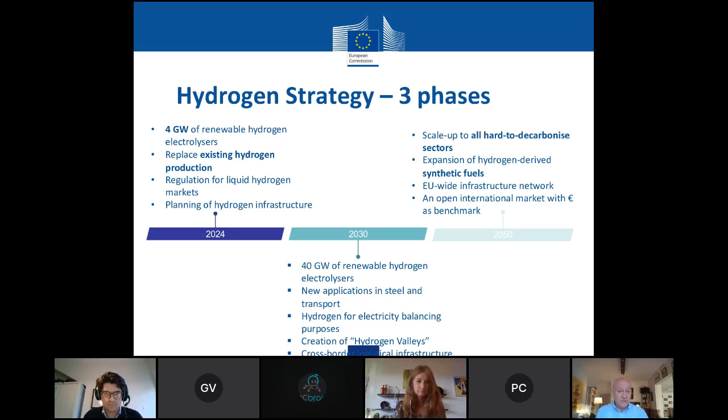Let's move to the next slide to talk about what are the main measures envisaged by the strategy. It is very obvious that we need at the same time scale up renewable hydrogen production and foster renewable hydrogen demand in general, but green hydrogen, obviously.

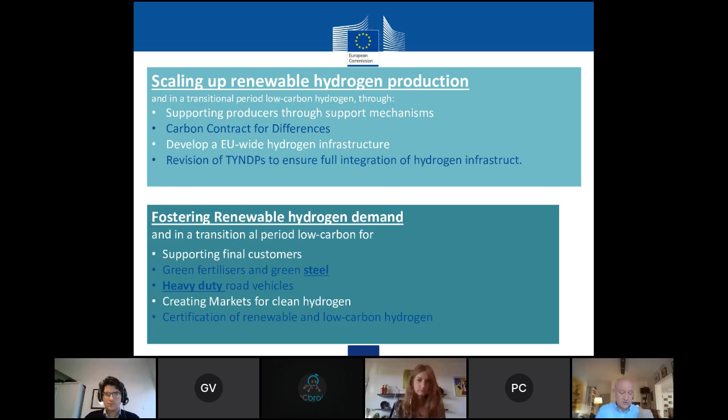So the point is we need to support the producers through proper support mechanisms. I just put there one of them, carbon contracts for difference - to pay the difference to the normal production cost of energy and have them produce hydrogen instead. But there are many other measures, including IPCEI projects and the likes, where the government pays some delta to make the projects viable. But the important thing is it must be a massive scale up, otherwise we will not get the cost down far enough.

Second thing is we need an EU-wide hydrogen infrastructure which can transport the hydrogen. This will be difficult to achieve at the competitive level by before 2030 because it's going to be based very much on repurposing existing gas pipelines. But until that, we need to find other methods of transportation which will still be useful afterwards, which are very much in the area of liquid hydrogen or organically bound hydrogen, already packaged hydrogen for use afterwards in form of ammonia or methanol or whatever. Compressed hydrogen will not really do the job for any long-term transportation.

And there's a number of measures. Just one important one that is also very operational is to have input to the 10-year plan for network development. That should already include a lot on hydrogen repurposing. And this is the production side and the transmission side.

And now we talk, of course, about the demand side, because who will take all this hydrogen if it's produced? Nobody will produce it if nobody is an uptaker. So there, it's important to support the final customers to develop these markets. I just give two examples here, which have been found most strategic at this moment: green fertilizer and green steel. So industry in general, industrial use of hydrogen. And particularly green steel is very promising, but also reasonably difficult to achieve.

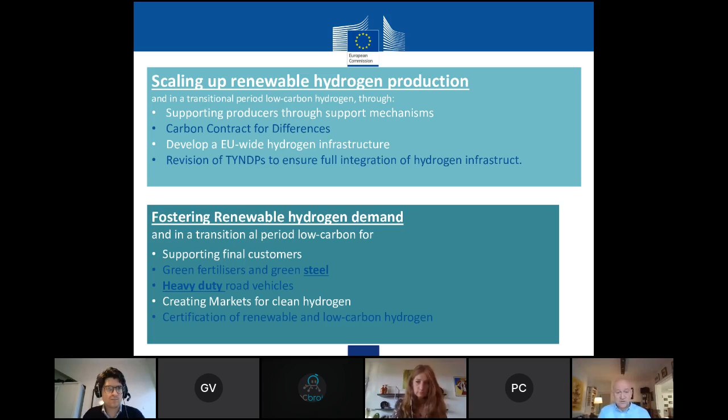And then the thinking is also to go for an accountability system that may even be based on blockchain, just to make it foolproof. We know from the renewable sector how difficult it is to rely on GOs because they have gotten not such a good reputation. Okay, so much very quickly for the strategy.

Now let me talk a few words also about the alliance. The idea is to involve industry, but in addition to that, all active stakeholders in the clean hydrogen ecosystem, and bring together supply and demand, including all of society and NGOs. We have more than 900 members today, 1,000 maybe possible before the weekend. And if you want to sign up to it, it doesn't cost anything.

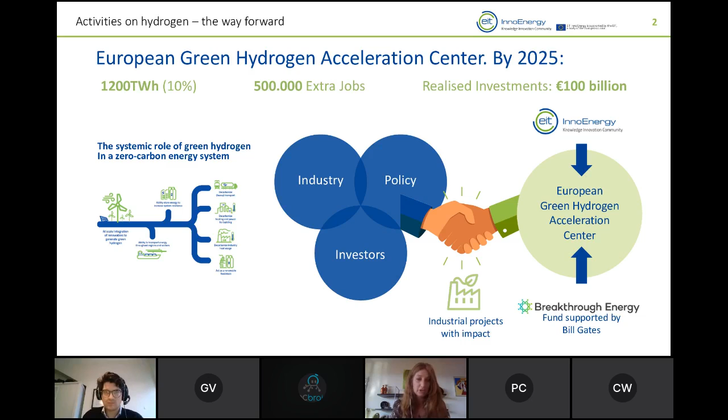And today we have already signed the agreement of our first industrial pilot that aims to produce green steel, which is exactly what Mr. Weinberger was commenting before, at a competitive price with green hydrogen. And the beauty of it is that the project is replicable.

As I was saying before, during the past 10 years we have been investing and de-risking solutions for customers and investors to work with in order to accelerate dramatically the energy transition. So today, more than 40 solutions are ready to market for renewables, either renewable generation or optimization - that would be photovoltaics, wind onshore and offshore, of course, tidal and wave energy. And as far as the hydrogen value chain is concerned, we have brought to maturity several types of solutions that are all across the value chain, as you can see.

So there's production of hydrogen with electromagnetic electrolyzers from Hymeth in Denmark. And also, Christian, you were talking about transport as being a major stake. So of course, HySiLabs is the one tackling that, doing liquid transportation of hydrogen. And when we talk about transportation, it's also important to optimize the flows to have the best infrastructure possible and lower the cost—that's the job of DCbrain, who you'll hear from later. Thank you, Christian, for talking about the importance of certification. That's what FlexiDAO is bringing today: real-time renewable tracking based on blockchain.

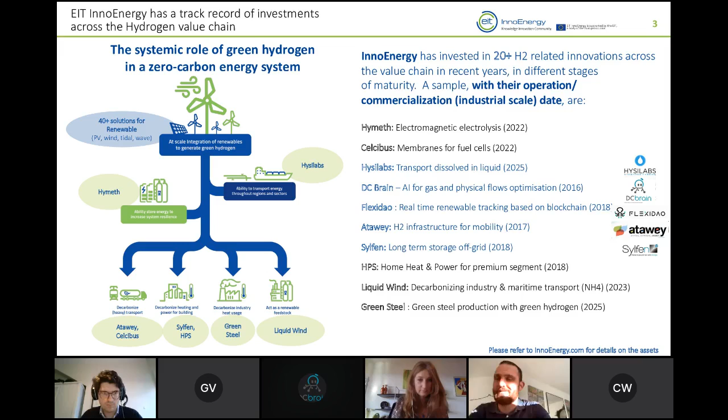Thank you, Raluca. I'm Pierre Casanova, co-founder of HySiLabs. HySiLabs is a startup based in the south of France and supported by InnoEnergy. We are based in Aix-en-Provence, and we are developing a new way to transport and store hydrogen.

But before we start, maybe a quick wrap-up of what Christian and Raluca just said. Hydrogen is a key element in the energy transition. It can be easily produced simply by splitting water, and you'll see this kind of technology with the other speakers. It's a key element to transport and store energy. When you use hydrogen, the only byproduct is water, so it will play a real role in the energy transition and can be used in several applications.

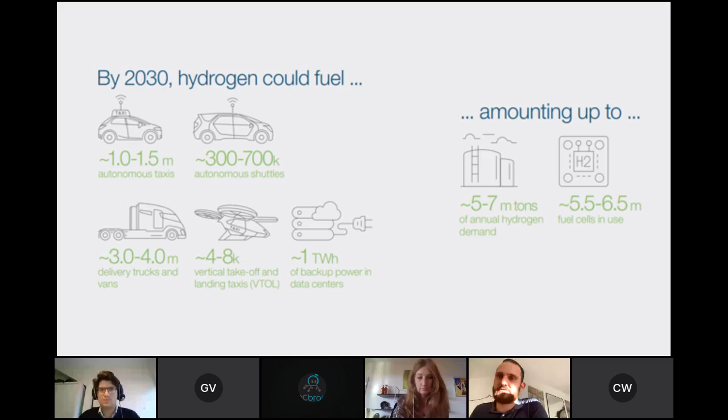I won't spend much time on this slide since other speakers will talk about final users and applications, but a quick overview: hydrogen will have a real impact in the mobility sector, from small vehicles to large vehicles, as well as maritime and stationary applications. It's a huge market—I won't go into data and figures, but hydrogen transportation and storage will be something we have to deal with for the future.

The main challenge right now in hydrogen is how to transport and store it, because we're pretty sure we'll have the capacity to produce hydrogen in massive amounts, and we'll consume this hydrogen across different applications like maritime or mobility. But because of its gaseous state, hydrogen is still complicated to store and transport at massive scale.

So what we developed at HySiLabs is a new way to transport hydrogen. Instead of storing and transporting a gas, we use a liquid carrier. This liquid is stable at standard conditions and has a high hydrogen storage capacity. Compared to high pressure storage, you can store up to 7 times more hydrogen for the same volume and weight. When we compare our solution, HydroSil, to the market, it has the highest storage capacity, even higher than liquefied hydrogen.

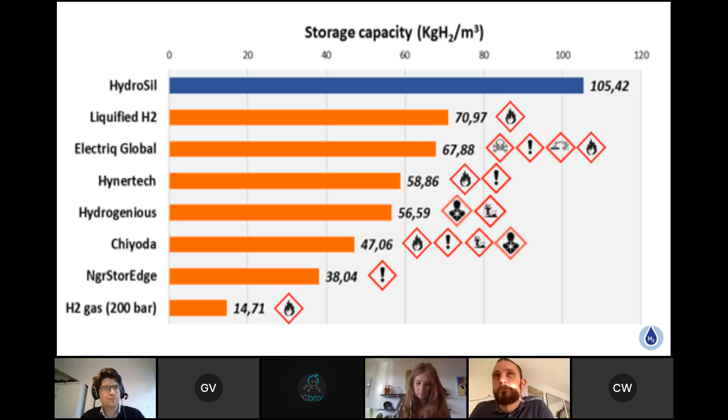It has been developed in France and in Europe, and has been patented. We patented the molecules, and we also patented all the chemical aspects of this solution.

So that's a quick view of how we will be implementing this value chain. Basically, we will plug the solution, a hydrogen unit, to a hydrogen production plant. We will bind the hydrogen into the liquid carrier, use the same liquid logistics as before, and then release hydrogen at the hydrogen consumption plant, for instance a hydrogen refueling station. We don't need any energy to release the hydrogen from the liquid, we just need energy to charge the hydrogen into the liquid.

So the main difference of this solution compared to others is that we don't need energy to release the gas. So we don't need specific, complicated infrastructure to release the hydrogen from the liquid carrier.

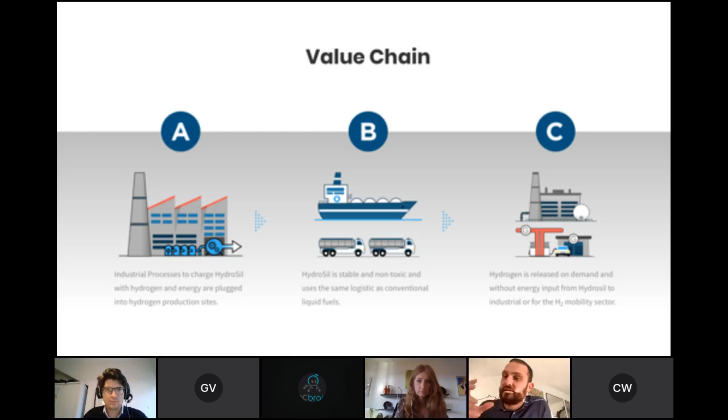That's a quick view of what we have done so far, and the team. This slide is about 3 months old, but we are now 12 people in-house, and we will be 15 at the end of the year. We have a strong advisory board supporting us with strong expertise in different fields, from the utility sector to oil and gas companies.

About the timeline, since Raluca talked earlier about technologies ready for the market: we created the company in 2015. We've been supported by several big companies, but at the beginning, thanks to InnoEnergy, we raised 2.5 million euros. We have several projects ongoing right now that we'll talk about later, and we will look for funds at the beginning of 2021 to accelerate the integration of this technology into the market, and to accelerate co-development with major players in the utility sector and oil and gas companies.

Also about the ongoing projects: on the left of this slide are all the end users interested in the technology. As you can see, in maritime applications there are a lot of projects. On the right side are all the projects we have ongoing that we can talk about, though some are confidential. We are part of a big consortium with ENGIE and Toyota, which consists of transforming sun power into a liquid fuel, and HydroSil will be this liquid fuel. So basically it's a European technology and a European startup, which is why you can see a lot of European companies we're dealing with.

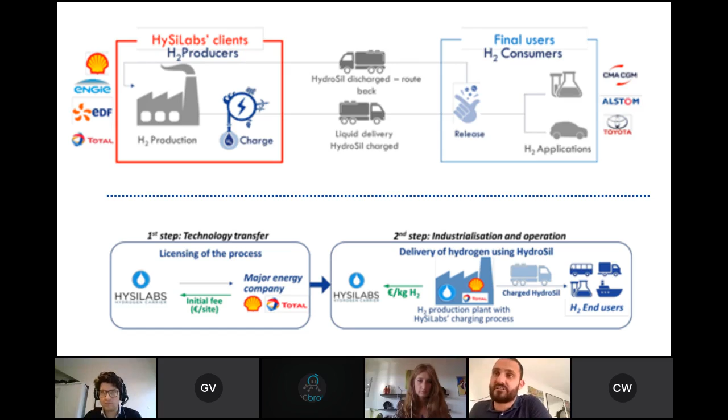That's a quick overview of how we work. We are transferring the solution to our customers, which are hydrogen producers -- it could be oil and gas companies, utilities, or EPC companies. We will not build our own plants; instead we work closely with these major energy companies to build plants together to charge hydrogen and then deliver it to different kinds of applications. That's why we can target a lot of applications, including all the hydrogen applications presented by Christian before.

And as you can see, there is a real need for hydrogen transportation and storage. We've been supported several times by InnoEnergy again -- thanks again, guys -- but also by big companies like Shell and Airbus. We're also very proud to announce that we've been part of the Green Deal award challenge call we talked about before, and we've been supported with more than 2 million euros. I'm pretty proud of that, and that's also the reason we've tripled the employees of the company over the last 3 months.

So that's pretty much all I wanted to say. As I said before, I'll be quick. Again, many thanks for this opportunity. So basically, we make hydrogen easy to deliver and store by developing a unique hydrogen liquid carrier. Thank you, guys, and I'll be able to answer your questions at the end of this webinar.

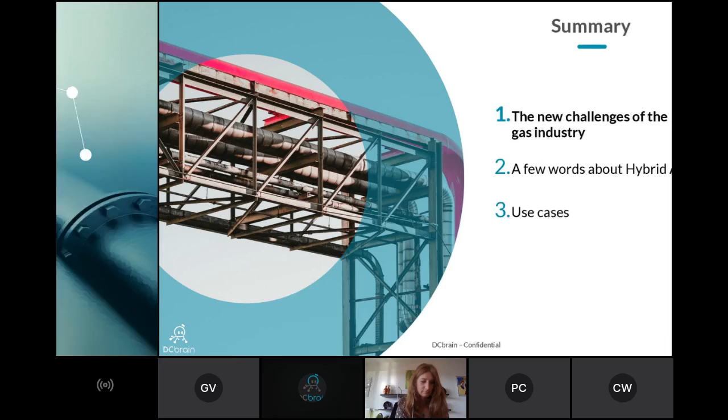So basically, very rapidly, the new challenges of the gas industry following hydrogen injection. As you all know, gas network operators are divided between transmission, so big pipelines, and distribution operators, so small pipelines that bring the gas directly to your homes.

Those operators have new challenges related to energy transition. They have new rules to comply with. Customers need higher quality of service. And of course, they need to inject new gases into the network. I've been talking a lot about biomethane and biogas for the past 10 years, and we are talking a lot about hydrogen for the past 6 months, I would say.

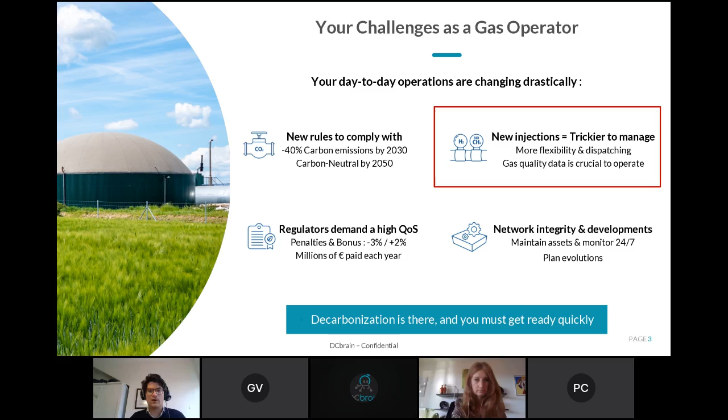Obviously this project has started before that, but everybody is talking a lot about hydrogen injection into gas transmission networks. And it's creating new challenges for gas TSOs. It has been already said before, injecting hydrogen into existing networks is very interesting, but also very challenging.

It's an interesting option because the fundamental idea is to store and transport green electricity using power to gas assets. You are going to generate electricity based on renewable energy, PV, wind farm, and so on. And this electricity, most of the time, you can't consume it right away, so you need to store it. Either you can use batteries, mechanical storage, and so on. But you also can convert it to gas using different techniques, globally called power to gas.

So you transfer power to electricity to gas, and then this gas you can inject into existing gas networks, which is very interesting because you already have the assets, you already have the infrastructure, so you are able to store green electricity with limited capex, limited investments. It's a very interesting idea, but it's very challenging.

Why? Because the gas you are going to create is called green hydrogen, and hydrogen does not have the chemical composition of classical gas. It's a very thin molecule, so it can have an impact on asset integrity. And it does not have the same quality as classical gas, so it will have an impact on network balancing, invoicing, and quality of service. Meaning that if a customer is going to get more hydrogen, they are going to pay less, because hydrogen brings less energy than classical gas.

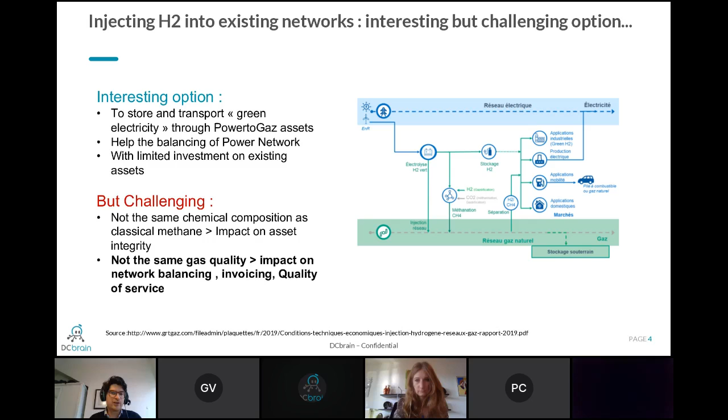So globally, if you inject new gas, especially hydrogen, into an existing gas network, you need to be able to track gas quality. You can do that by implementing a lot of sensors on the network, chromatographs, but that's going to be super expensive. That's why at DCbrain we came up with a software that is able, by computing flows, to better track gas quality.

Basically, we created what we call a smart gas management suite. It's 5 different modules of the same software dedicated to gas management issues: asset mining, loss analysis, track and forecast, smart simulation, and INES optimization. The software is called INES, for Intelligent Network Solution.

And then you can use artificial intelligence, basically the idea of using all the data coming from the networks to better understand flow propagation. The problem with purely artificial intelligence is that you need a super high quality of data, and this quality of data you will never reach. So basically, at DCbrain, we created what we call hybrid artificial intelligence, and the idea is we are going to use artificial intelligence based on data to complete and enhance classical modelization.

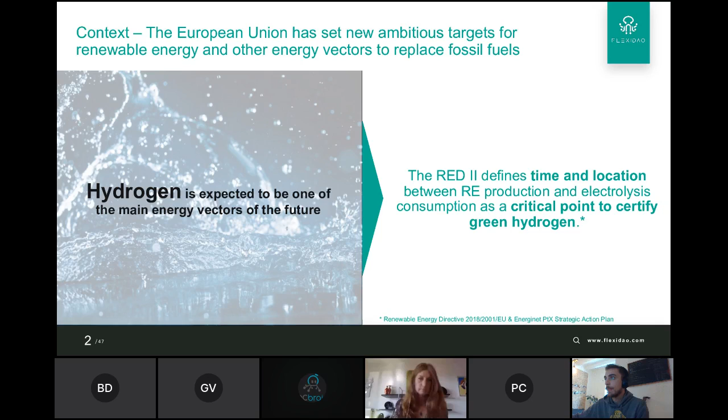And this is indeed what I've just said, why time is important. There's a pretty famous Stanford study that says whenever a grid passes 20% penetration of renewable energy, the yearly accounting of renewable energy, certifying energy on a yearly basis, leads to wrong calculations of CO2 emission avoidance. This is because renewables have inherent fluctuations, so if you take an average or total volume over the year, you're completely ignoring those fluctuations.

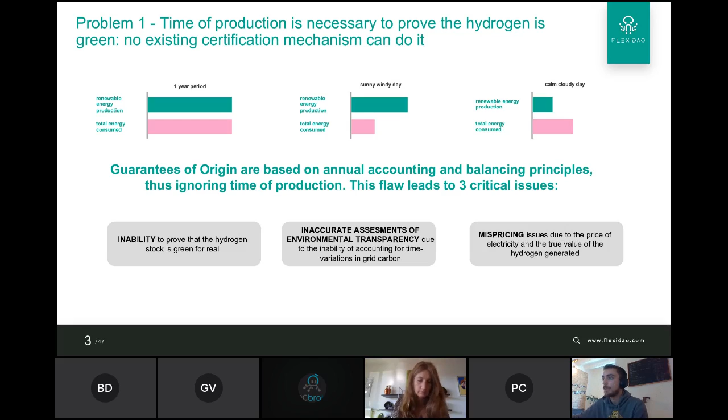With such a system, we could have an electrolyzer that consumes only at night, buys solar guarantees of origin, and that would be green hydrogen. Then, of course, the CertifHy project, the coalition now defining how guarantees of origin will be converted to hydrogen certificates, will somehow tackle this issue. But the underlying problem remains that there are currently no certification mechanisms with high granularity in time stamping that can reflect the actual production curve.

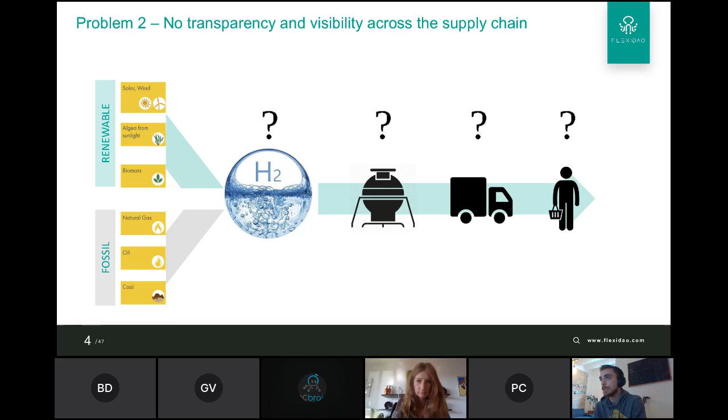The second issue is that supply chain traceability still has low visibility and transparency. At least this is what our partners are telling us, and that's why they're interested in this. As some of you might know, blockchain technology at an enterprise level has reached maximum scalability when it comes to supply chain traceability.

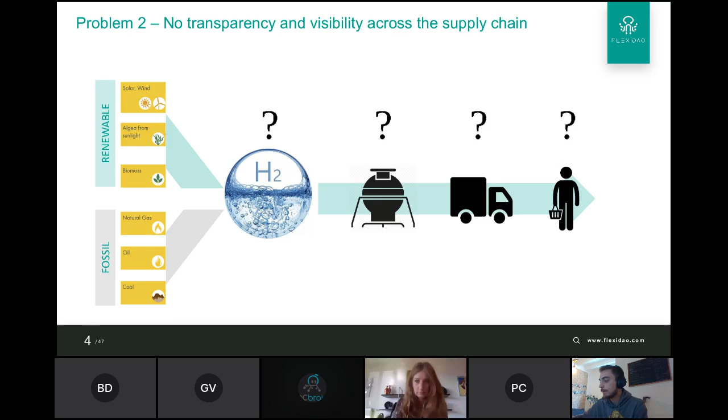So what we're trying to understand is, as a company with a validated technology in the market, can we actually prove that the electrolyzer works at the same time as production, and then create a digital certificate that is bound and linked to an hourly green energy certificate, tracing it all the way down the supply chain. The supply chain part is new for us as a company. As I said at the beginning, we're strongest in the renewable energy part, and that's where we're mainly focusing right now. In a nutshell, our product in the market is called Respring.

Respring is a tool, a platform that enables the certification of origin and end-to-end traceability of energy vectors. Prior to hydrogen, we were working with renewable energy, but not only that - we work with electricity as a whole, with green gas. Now we're taking the opportunity, with a few partners, to explore how this application can increase transparency in the supply chain of the green hydrogen market, and ensure that we are really betting on green hydrogen.

So what the platform does - and we are now building a test in Spain with a major utility we cannot yet mention, press release will come out soon, and another one in Denmark.

Basically, the platform collects production data from different plants. Either if there's a PPA, it can also be off-site, thanks to our technology. Then it collects consumption data, and does a real-time certification of production matched with the electrolyzer. Once a certificate for a specific unit of hydrogen is created, we can track it along the different steps of the supply chain. We have a user interface that allows all the different parties to interact and download the data. Since it's a distributed database, all parts of the value chain can access the data and at the same time write whenever the hydrogen reaches a new point, and it's completely secure and safe, so data can be trusted by all parties.

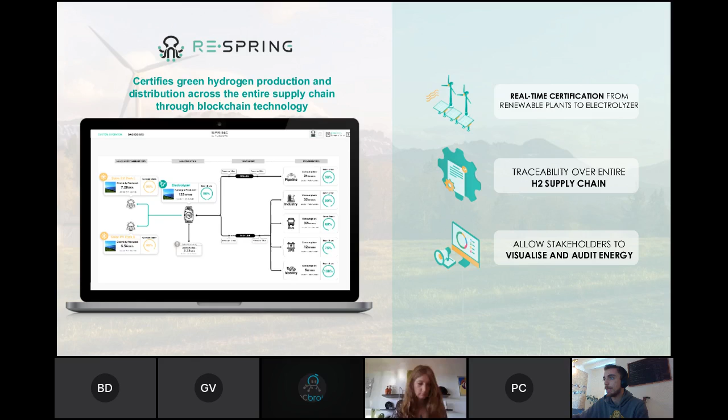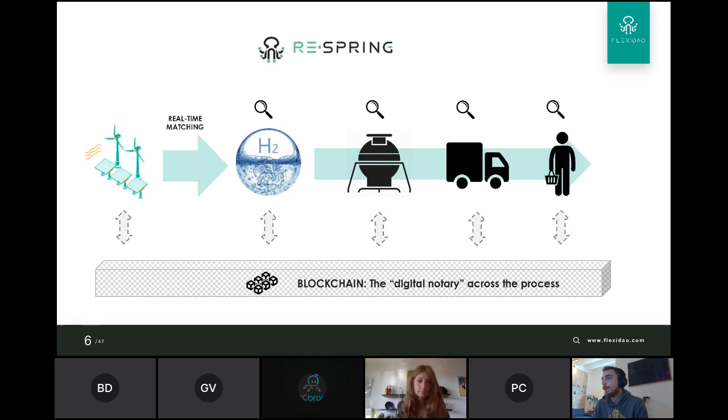So this is effectively what I've just explained - we execute the real-time matching and then the traceability. And a very important proof point that this solution is needed... sorry, before I jump into that, just a bit of a track record.

As a company, our main business model is to partner up with grid operators and utilities to collect production data and have a wide portfolio of availability of production data that we then collect, certify, and track for the end consumer. We currently have 24 corporate buyers using our platform in 9 countries, and we track 3.7 terawatt hours of renewable energy per year of consumption. Production is much higher.

This leads me towards the end of the presentation, and links to another initiative we are collaborating on together with InnoEnergy and many other parties. As a company working closely with green certificates, we have seen how flawed they are. We strongly believe that not having the time component in a guarantee of origin is a big limitation, especially as the market evolves. Sector coupling, storage, vehicle to grid, 24/7 procurement of renewable energy - these are use cases that guarantees of origin cannot facilitate or certify. We believe that to truly go zero carbon in grids with high penetration of renewable energy, we need a new type of commodity: at least an hourly renewable energy certificate. That's what Energy Tag aims to do.

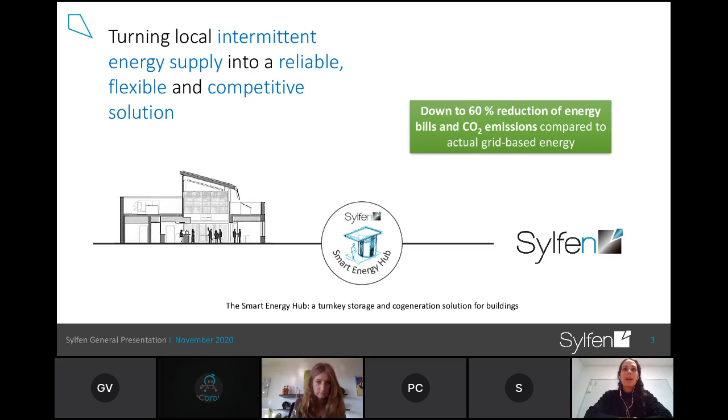The thing is, a building that is producing its own energy with a local storage and cogeneration solution is able to rely on what is produced locally. The solution we have developed is called the Smart Energy Hub, and with this hardware and software solution, we are able to reduce energy bills by up to 60%, and the same amount - down to 60% - of CO2 emissions.

The solution is a hybrid energy storage system and cogeneration (CHP) solution. We include a battery for fast reactivity and really fast storage, and an innovative reversible electrolysis and fuel cell that helps us store huge quantities of energy without any self-discharge in the form of hydrogen. Thanks to this technology, we are also able to have backup to supply electricity and heat to the building using natural gas. So a building that has its own local renewable energy production on the roof or on the parking lot is able to manage all of its energy locally and supply itself.

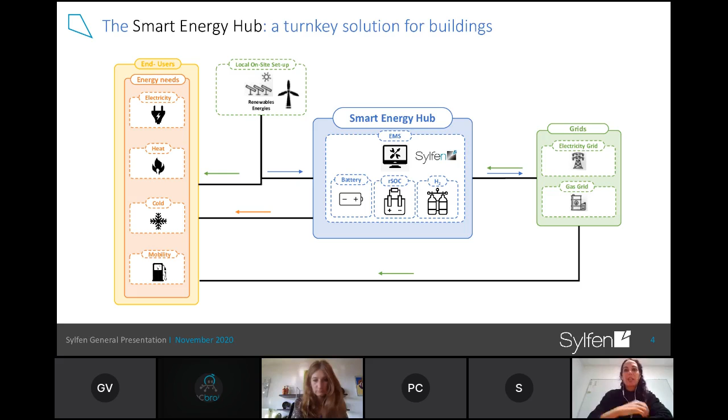Basically, how does it work? When you have excess energy, when the sun is producing and your building is consuming, and the time of production is in accordance with the time of consumption, you are able to auto-consume directly what you are producing locally. All of the excess energy will be stored first in the batteries and second in the reversible solid oxide fuel cell. On the reverse, when you need energy, you will take it back from the batteries and from the hydrogen, as well as from natural gas.

Sometimes in winter, there will be lots of days without any sun, and your hydrogen tank will be empty. All of this is made possible thanks to a piloting software, a proprietary suite of software that we have developed internally, which makes this a multi-energy management software.

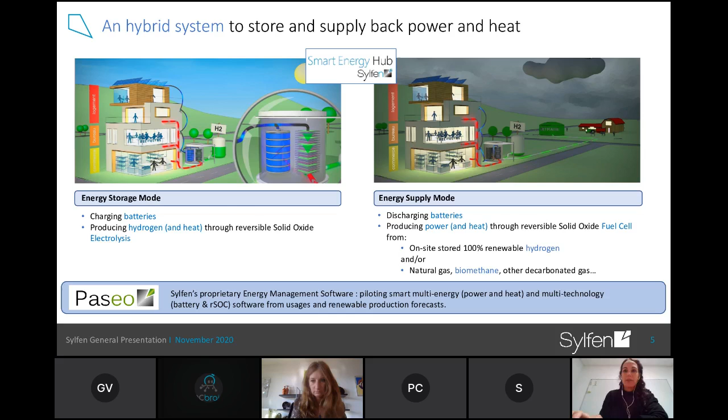Just some words about our go-to-market strategy. This methodology helps us firm up the first contracts, the first sales. First, we work with partners from the building value chain, meaning architects, engineering companies, all of the firms that work alongside the building owners to help them construct the building.

Then, along with these partners, we make what we call a projection study, where we study the DNA of the owner's site, meaning the building's electrical and thermal consumption, along with an estimation of what the renewable energy can produce on site. Then we make some simulations in order to precisely dimension the system to fit the objectives of the building owners.

The third stage is, of course, to make a proof of concept, what we call a market proof of concept, in different countries, where we are able to qualify first the local integration and all of the regulations, because building regulation really differs from country to country. Working with local partners helps us get knowledge of the local market and all of the specific regulations. In the last stage, thanks to this first market proof of concept, we are able to deploy the system that will really fit the needs of the local market.

This methodology helped us sign our first sale, which was not in France but in Monaco. The solution will be implemented on residential buildings that have solar panels on the roof, and we will provide the energy management for these buildings. In this project, we were brought in by Egis, a French engineering company.

Working with French partners who are able to deploy and who are also working in the country is really key for us to deploy internationally. They called us because they wanted to get the E3C2 label from the new regulations of the E-plus C-minus experimentation here in France, and they were not able to design the best solution with existing technology on the market to answer the customers' needs.

So they called us, and we did the projection study. Monaco was really keen on this kind of technology, putting hydrogen inside a residential building, and we made the sale.

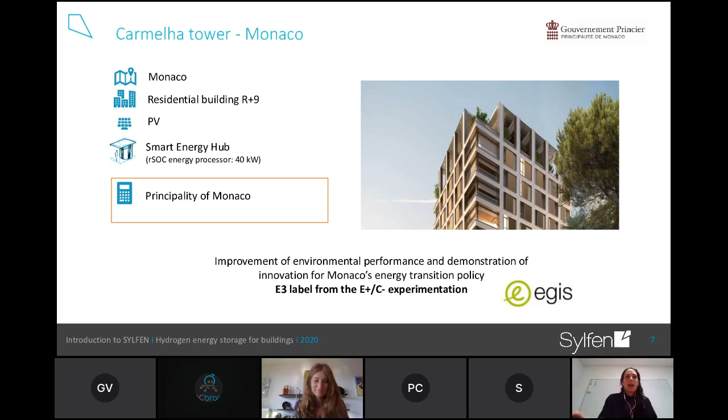In order to find the demonstration site, we found Environment Park, which works with startups and is also really strong in R&D on hydrogen and energy efficiency for buildings, etc. We went to Italy to explain the project. We were already working with CEA and ENGIE inside the consortium, so it was quite a strong consortium.

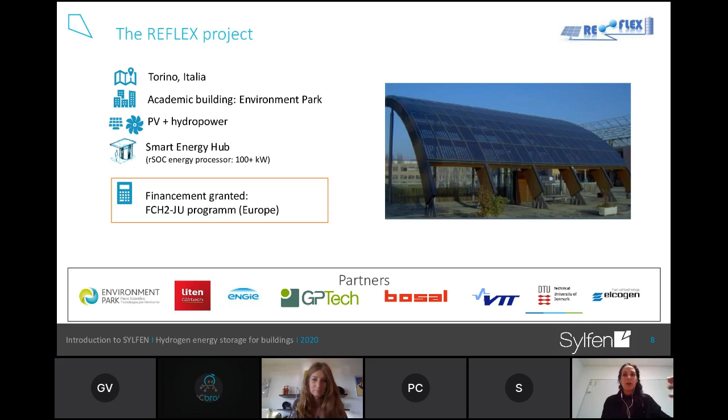Another project, GIFT project. In here, so it's again a bit different. We are 17 partners, and the objective of the project is to develop a smart grid and integrate some flexibility.

Caroline has a problem. Hello, Caroline? So I think we have a network issue here, Caroline was kicked out. What I suggest is that she takes it over after during the questions and answers, unless she's back. I'm back here, yes, sorry, I'm connecting on my phone, but it's still okay. So sorry about the network.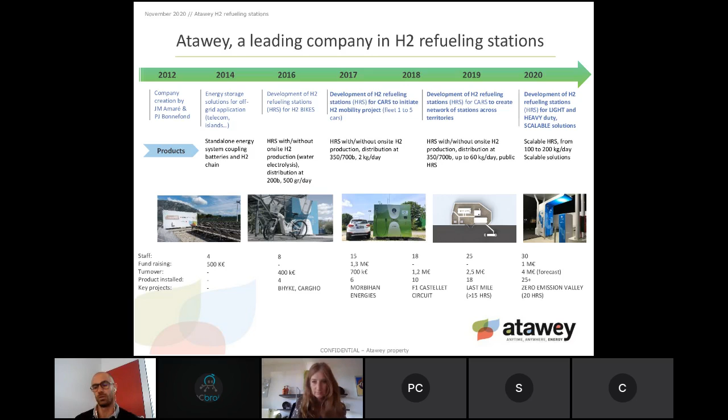All right, so let's talk about hydrogen refueling stations now. Just a few words about Atawey, so we are a French company, we are 30 people, based in the Alps, in Chambéry, and we are designing and manufacturing hydrogen refueling stations. We will make this year roughly 4 million euros turnover, and over the last 3 years we have multiplied our turnover by 2 every year, which shows the dynamic of the hydrogen mobility market.

We have a slightly different market position from our competitors, and here is the reason why. I've taken as an example the French hydrogen mobility market. If you have a look at what happened in France regarding mobility, there are roughly 40 hydrogen refueling stations, public and private stations together. There are 45 hydrogen refueling stations under projects. And on the roads today you have almost 450 vehicles, mainly cars, and between 10 to 20 buses.

So if you analyze the digits I just showed before, in Paris you have 5 stations for 300 vehicles, which is almost 60 vehicles per station. In Paris it's quite different because there are a lot of hydrogen taxis. But then if you look at the other part of France, you have 35 stations for 150 vehicles, which is around 5 cars per station, which is nothing.

So the market shows that today, the need for the hydrogen refueling station is for small stations to refuel a small fleet of cars.

And if you move to the midterm mobility market, so between 23 and 25, we expect in France to have 5,000 light-duty vehicles and around 200 heavy-duty vehicles, so buses and trucks mainly.

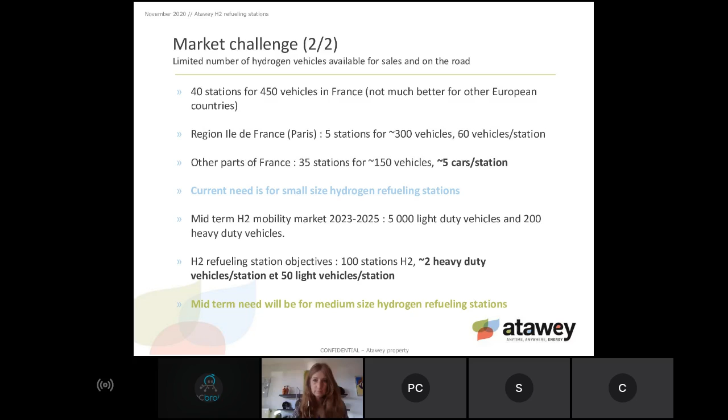And for that, we will need refueling stations that will be able to refuel around 2 or more heavy-duty vehicles and 50 cars. So the midterm need is for, let's say, more medium-sized stations.

And when you look at what the refueling station manufacturers offer, it's mainly large stations to refuel hundreds of vehicles and also dozens of heavy-duty vehicles. But the thing is that the use and the usage is not here.

So that's why at Atawey we have decided to take another path. And we are making stations to answer 3 needs. The first one is for pioneering projects, so we make small stations to initiate hydrogen mobility projects.

So it's a small station that you can see on the upper right part, to refuel a fleet of 1 to 5 cars. And actually that was quite successful because we've sold 10 to 15 stations of this model, mainly for local authorities and for large companies that wanted to test hydrogen mobility with just a few cars.

Then the second market we address is the creation of a network of hydrogen refueling stations. So here we are making a slightly larger station that can refuel a few heavy-duty vehicles and also between 10 to 100 hydrogen cars. And we have already sold almost 5 of these stations in different regional projects.

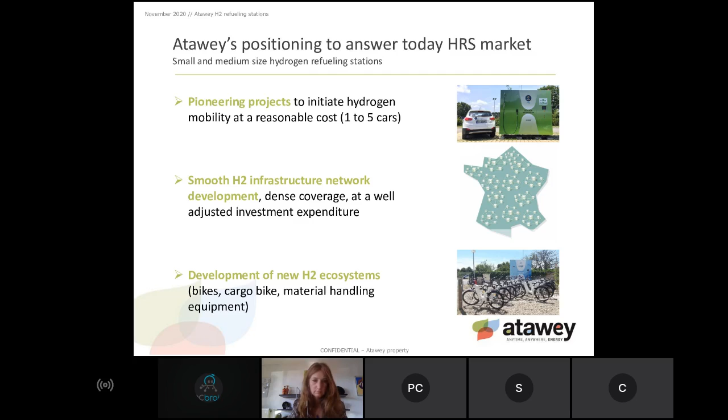And in this case, for instance, we've worked with a company called Pragma that is making hydrogen bicycles, and we have developed a hydrogen station for them.

Here is an example of the hydrogen refueling station we've made. This is the first market I was talking about, the refueling station to initiate hydrogen mobility projects. You can see it's quite compact, easy to install, and also easy to use, so almost everyone who comes to the station can use it easily and safely. The size here is almost two parking slots, so it's quite compact.

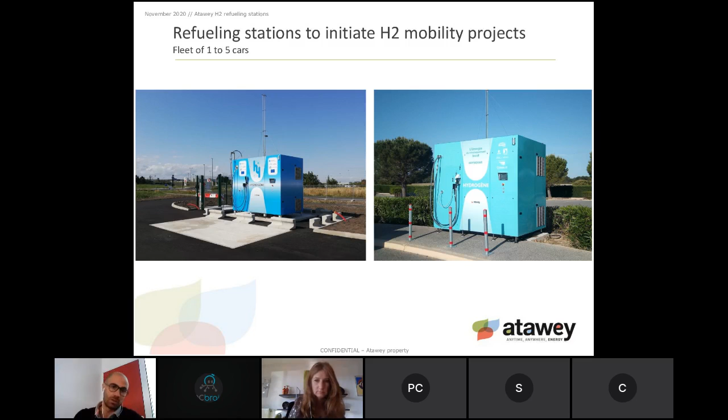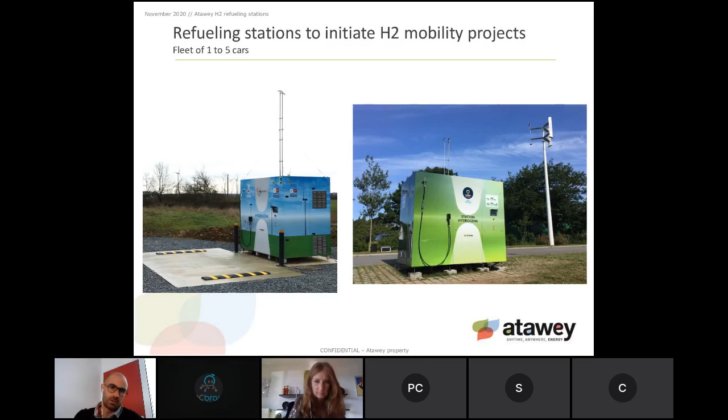Here's another example of the station we have installed for our customers, still to initiate hydrogen mobility projects. And these are public hydrogen refueling stations, to create a network of stations across the territories. It's slightly larger than what I showed before, but here you can refuel buses, hydrogen trucks, and of course hydrogen cars.

That's just another example. We were quite successful over the last 4 to 5 years; we have sold 25 stations, 18 of them are in operation in different cities. So you see here the cities in France where we have installed hydrogen refueling stations.

So our philosophy at Atawey today is that we are pragmatic, and we are developing products that answer today's market for mobility applications. So that's all for me.